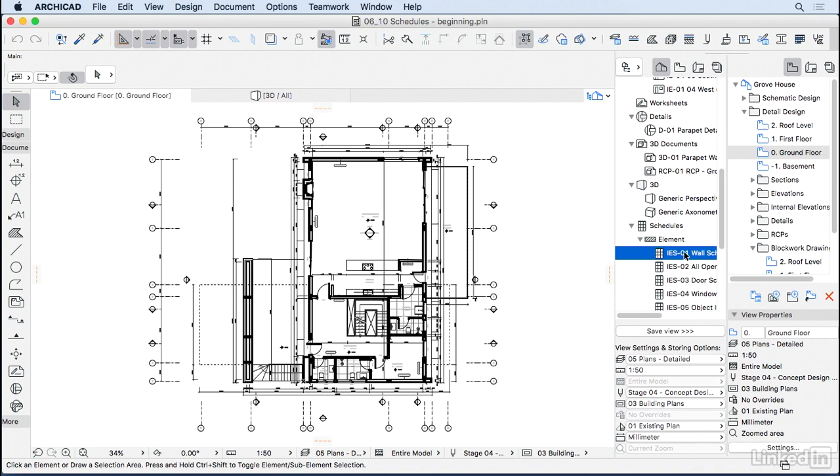One of the advantages of having a well-built 3D replica of your building is that you can quantify pretty much everything. So if you go here to the project map under Schedules, you will notice that ArchiCAD has already created some schedules for us, starting with elements. So if I double click here on this first one, wall schedules, ArchiCAD will show a schedule of all the walls that we have done in our project so far, with information like volume, thickness, height, area, and so on.

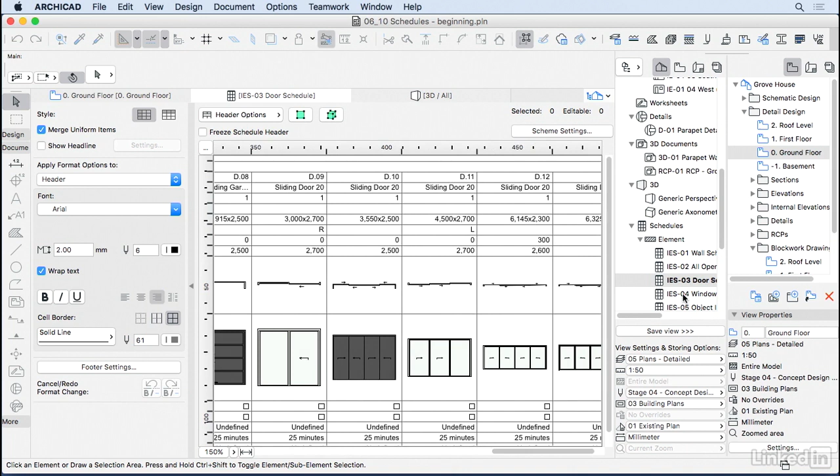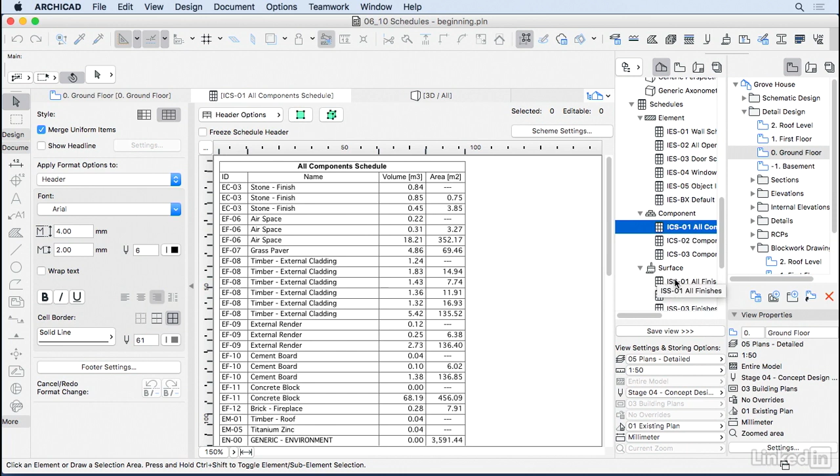If I go down here, we have a schedule for all the doors with a 2D symbol and also an elevation for all the doors. Same for the windows. If I go down a little bit more here in components and all components, you will see a list of every building material, the volume and the area of them, which is great for quantifying how much material I need for this construction. And then under the surface here, you will find schedules for all the finishes.

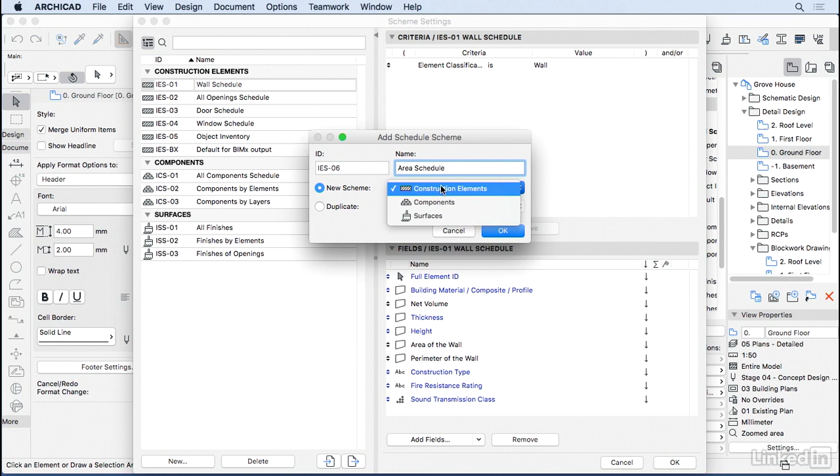But now let's create our own schedule for all the areas that we have in the project. So to do that, we go here on Schedule, right-click, and then click on New Schedule. Then ArchiCAD is going to ask us what's the ID and the name of this schedule. I'm going to keep the same numbering we have there. So IES 06, and the name is going to be Area Schedule. Now we have to choose if it is going to be construction, components or surface. I know zones are construction elements, so I'm going to keep it in constructions and then press OK.

So here on the right, we have the settings for the area schedule that we just created, starting with the criteria to get into our schedule. So the criteria for us is that the element type is a zone. So I'm going to change here from wall to zone. So only zones will get into our schedule. You can add more criteria like only zones that have a certain name or from a certain category. But for us right now, only zone will do.

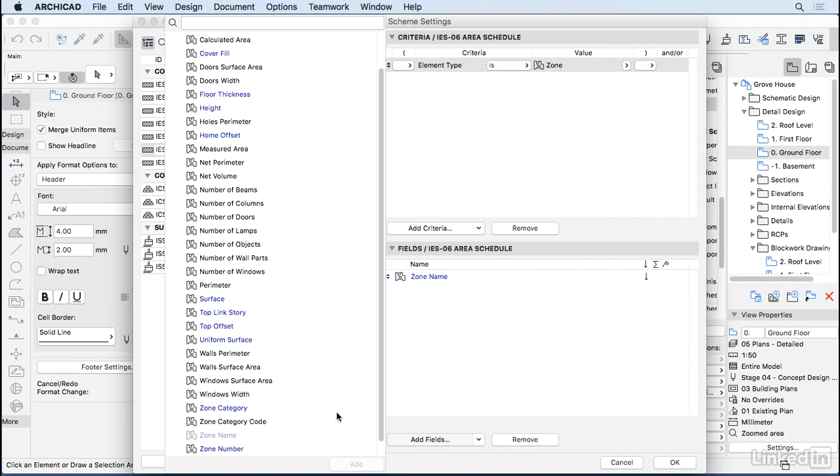And then here below, we can choose what fields go into our schedule. Let's click here on Add Fields, and then under the zone, I'm going to look for zone name, press Add, and then also the calculated area. So I'm going to click here and then press Add. Now let's go ahead and press OK and see how this schedule is looking. So here in the project map, let's go and click on our IES 06 area schedule. And here we have a list of all the zones and the areas of our project so far.

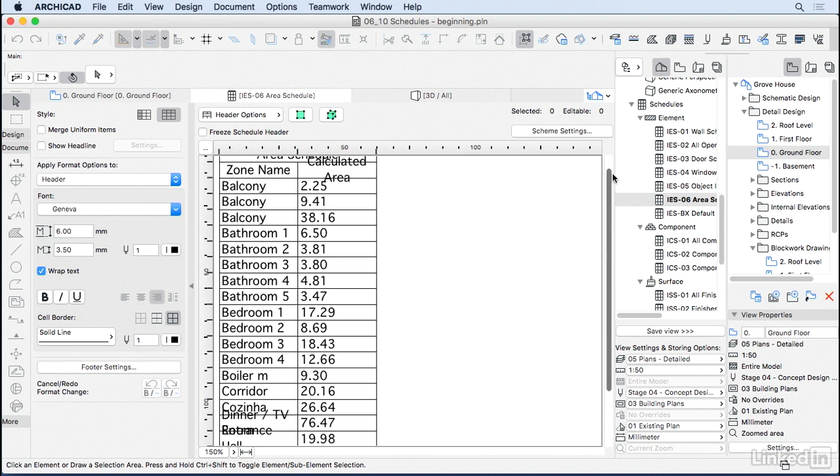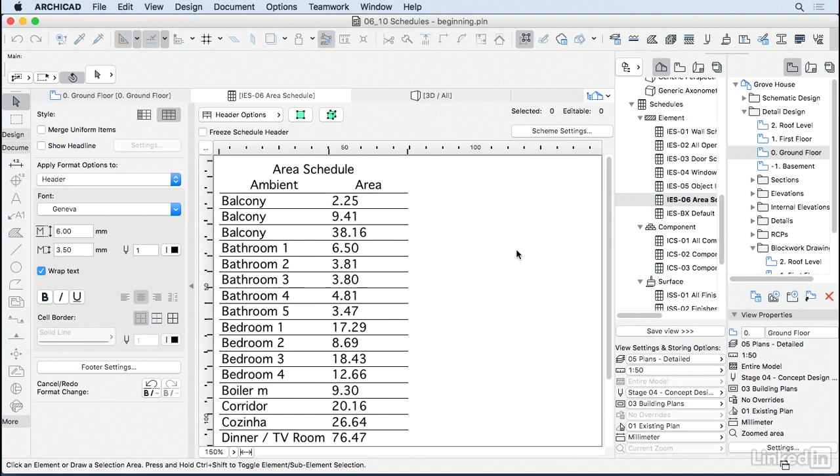Let's expand a little bit here and change some of those names. I don't want it to say calculated area or zone name. I'm going to change this to ambient. You can also click on any of those here and change the font settings and also the frames. For example, I don't want to see the columns here for the fields, and I don't want to see any of the frames for the title. We can also choose to merge the uniform items, so you will notice that all those three balconies will be combined if I check this box.

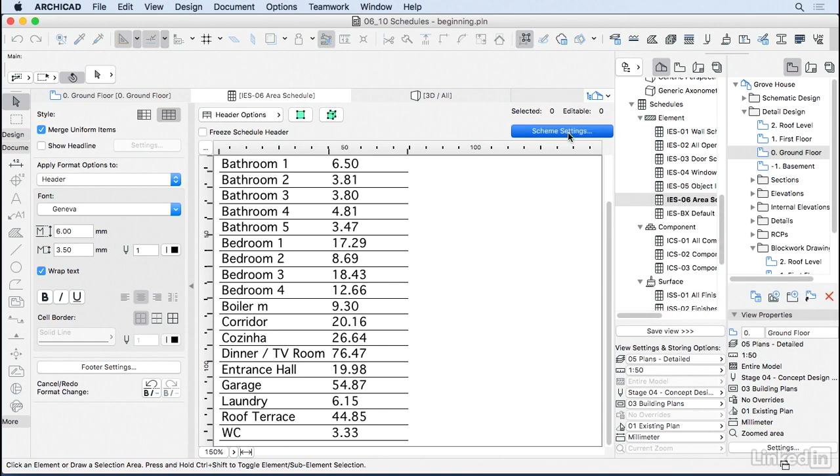Now let's add a total square meters here for our schedule. So to do that, you can either right-click here on Area Schedules and go to Scheme Settings, or you can go to this button here at the top, Scheme Settings. Now if you click here on the field Calculated Area, you will notice three boxes. And the second one is the icon for sum, where ArchiCAD will add a total at the end. So let's press OK. And you see here at the bottom that we have a total for the square meters. So let's also change here the borders.

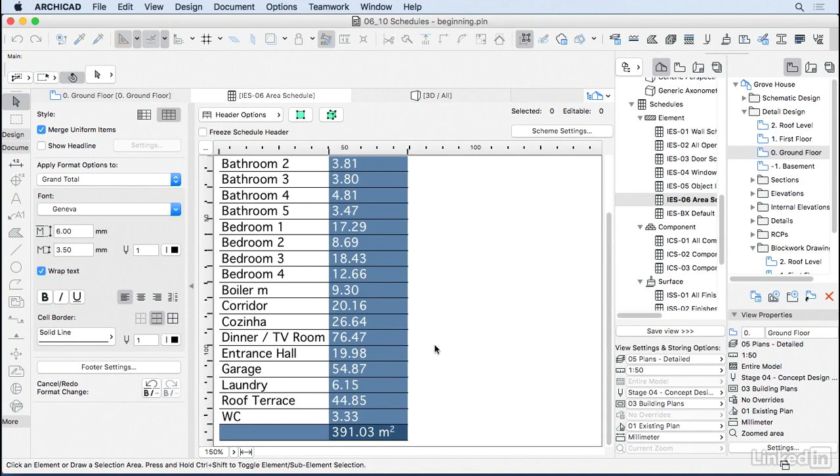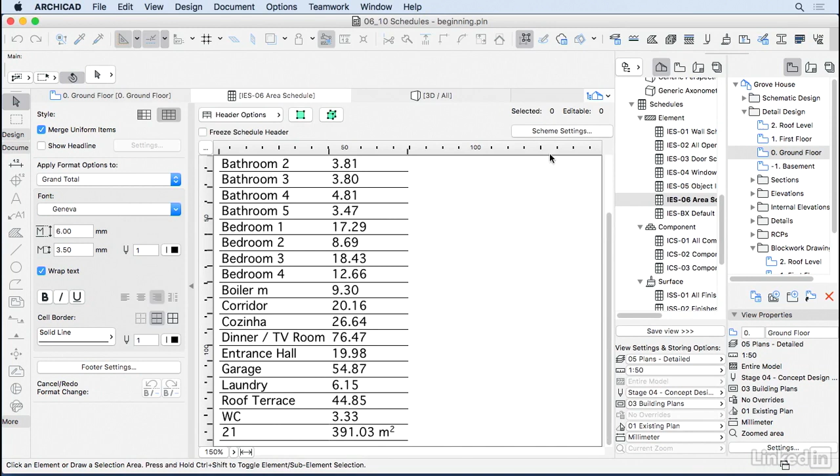But if I go here to the category zone name and I click sum twice, you will notice that we have a 1 here. And this means that now ArchiCAD is going to sum how many of those you have. So now at the bottom we have 21 rooms, and this is the total square meters of them. One other thing that I do a lot when I'm doing an area schedule is to add the home story. So if I go here to add fields and I type home, you will see the option home story. I'm going to click on it and add, and I will move it all the way to the top. Now if I press OK, we should have the home story as one of the fields here.

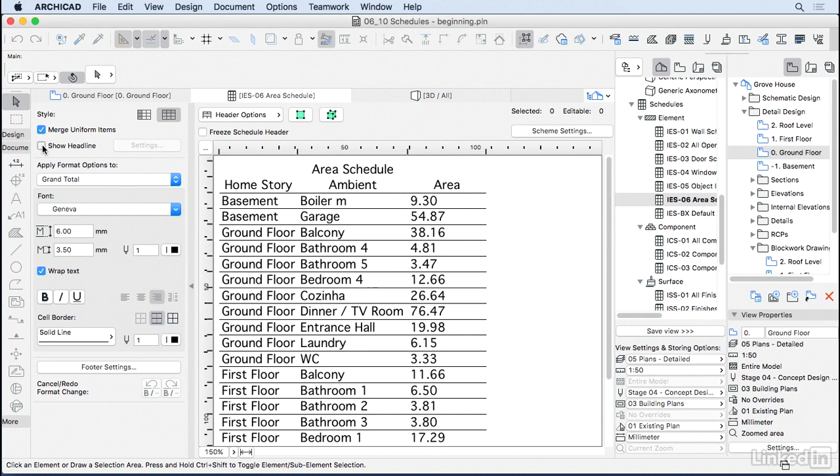And if I go here on the top left and check this box, Show Headline, ArchiCAD is going to group everything that is the same on the first field, like everything that is the same in basement, ground floor, and first floor. One other thing I want to add here is a subtotal of the areas and the amount of ambients per floor. So I'm going to go back to scheme settings, click here on the home story and then check the last box of those options, which is this little flag that means a check mark. So every time we change the home story, ArchiCAD is going to do a subtotal. Let's press OK and see how it looks.

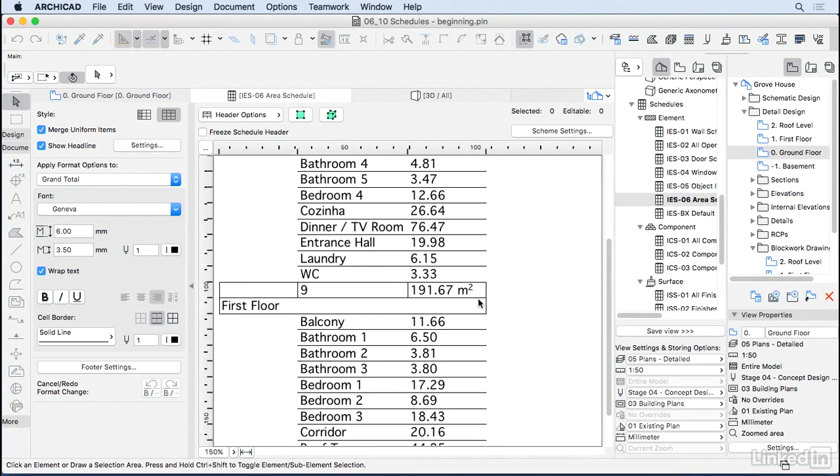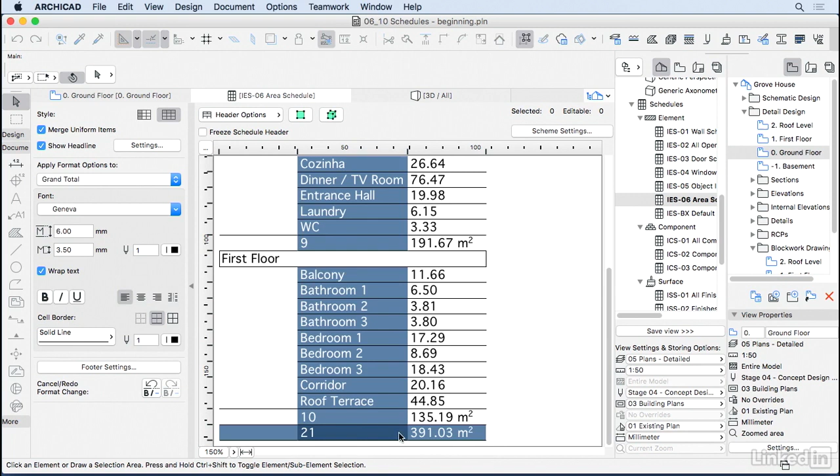And now we have a subtotal per floor. So here we have 2 rooms with a total of 64. I'm going to change the borders here as well. It looks a little bit more clean. On the ground floor, we have 9 with a total 191. And on the first floor, we have 10, total 135. And at the end, we have 21 rooms with this total. So I'm going to make this one a little bit more obvious, so we know that this is the main total there.

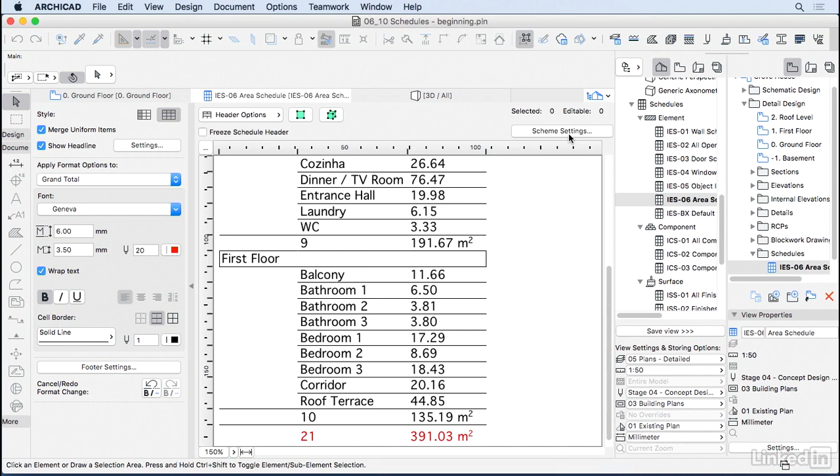So now we can go ahead and save this as a view. So I'm going to create a new subfolder here called Schedules, and I can drag this schedule inside that folder and we can place it in our sheet. But if you want, you can also go here on File, Save As, and save your schedule as an Excel or a PDF. I'm not going to save it right now. So the logic that we used to create this schedule is the same logic that applies when you're doing any other schedule, whether it is for a wall or for any of the surfaces. So try to explore a little bit and see what information you can extract from this model.